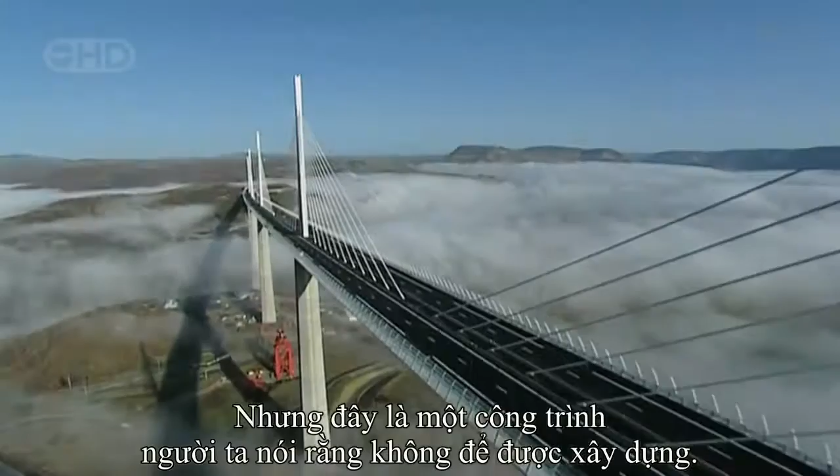But this is a megastructure they said couldn't be built. When I first showed the drawing of this bridge, they really thought I was crazy.

The team attempting to build this amazing freeway in the sky had to survive landslides, fight winds gusting at 130 kilometers an hour, and weather massive storms as the bridge simply hung in the balance. It's a bridge that pushes the boundaries of engineering to the limits, and then beyond.

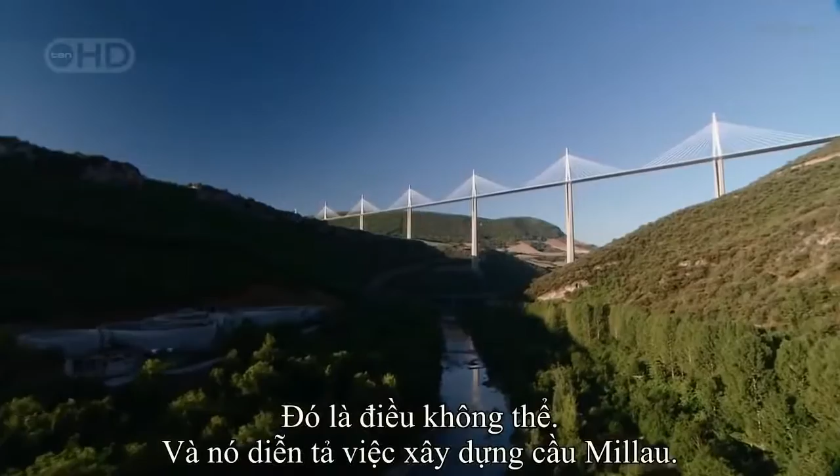Imagine building a series of Eiffel Towers, then slinging a 4-lane highway between them, all the way across one of the deepest valleys in France. Impossible though it sounds, that pretty much describes the building of the Millau Viaduct.

From the start, the construction team faced 3 daunting challenges. One, build the tallest bridge piers in the world. Two, put a 36,000-ton freeway on top of them. And three, erect 7 steel pylons, each weighing 700 tons.

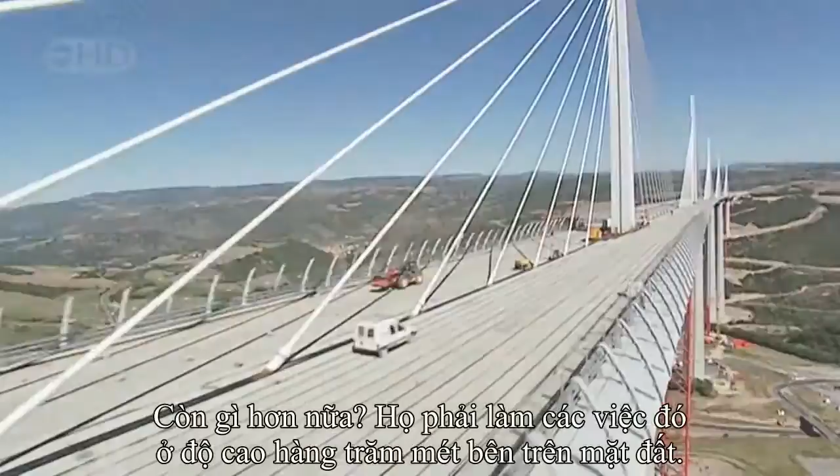And what's more, they had to do this hundreds of meters above solid ground. So high that if you were on top of the Eiffel Tower, you'd still be looking up at this awesome bridge.

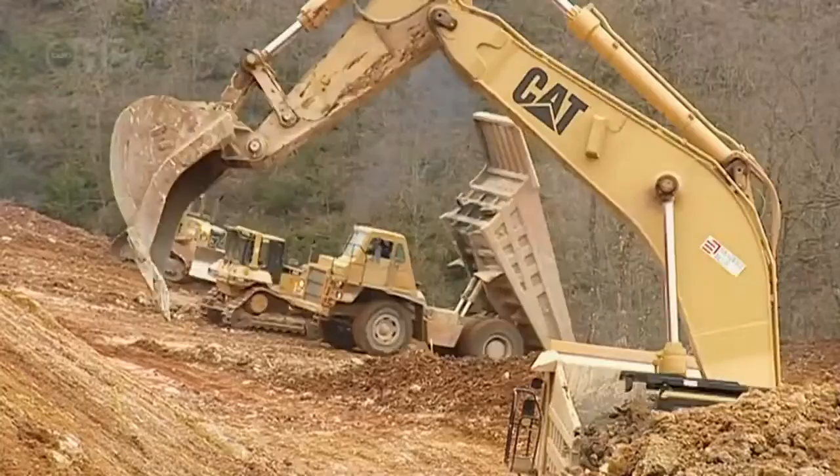October 2001, the team break ground. They're required to build a bridge that'll last for 120 years. And to win the contract, the teams promised to build it in record time, less than 4 years. By comparison, the world's longest suspension bridge, the Akashi Kaikyo in Japan, took a full 10 years to build.

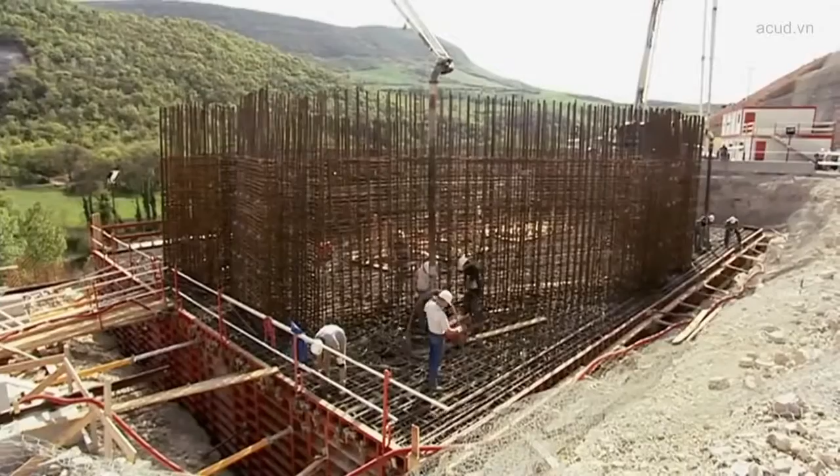To up the ante, any delay will cost them $30,000 a day in penalties.

There are 7 piers, numbered from the northern end of the valley. Number 1 will pose problems because of the steep slope. Number 2 will be the biggest challenge since it's the tallest. Crossing the river, number 3 is not much shorter. Then 4, 5, 6, and 7 climb the gentler slope to the south.

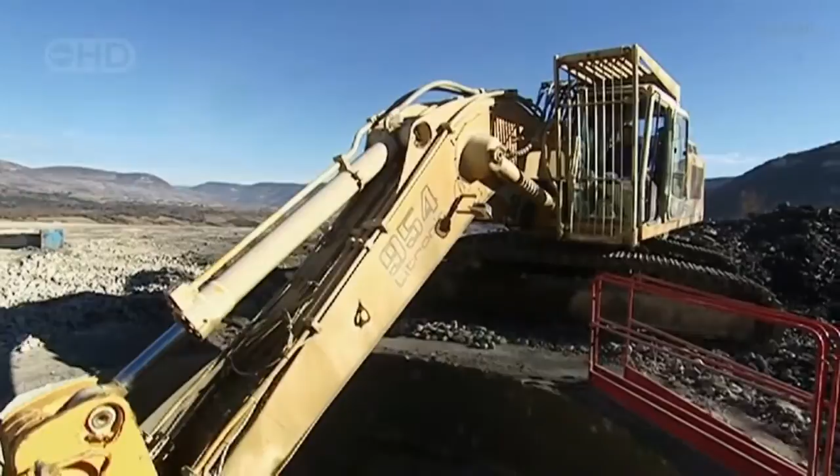To begin, the team had to bury the foundations deep in the bedrock in order to support the enormous weight the bridge will place on them. But the forces of nature were stacked against them.

Geologists have warned of the risks posed by the region's fractured limestone. The rock is full of cavities that are essential to the local cheese economy. These cave systems close to Millau are home to a unique bacteria responsible for the blue mold in the world-famous Roquefort cheese. But what's perfect for cheese could be disastrous for a megastructure.

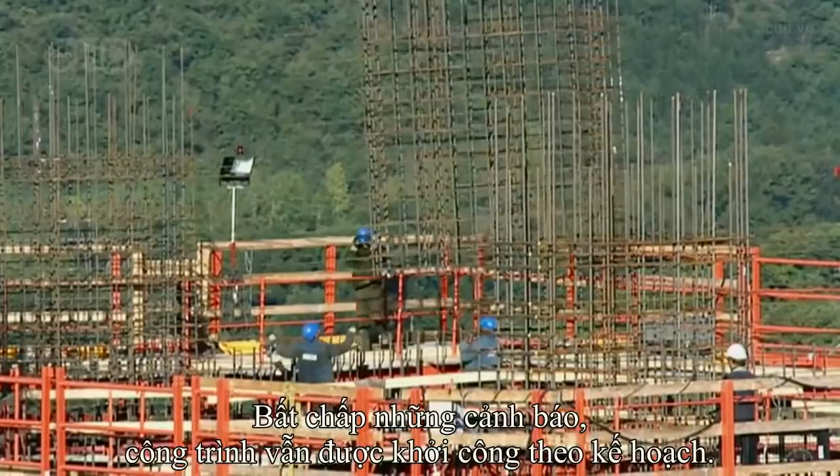The geologist's diagnosis spelt one thing: landslides. This kind of catastrophe could jeopardize the entire project. Despite the warnings, building went ahead as planned.

Then, well into construction, as predicted, a dramatic storm causes a landslide. 4,000 cubic meters of rock collapse around Pier 1. Fortunately, the fallen rock doesn't damage the pier, but the warning is clear. They're forced to divert precious manpower and equipment to stabilize the slope and prevent a repeat collapse.

So if the area is prone to landslides, why did they build the world's tallest bridge here in the first place? The answer is simple.

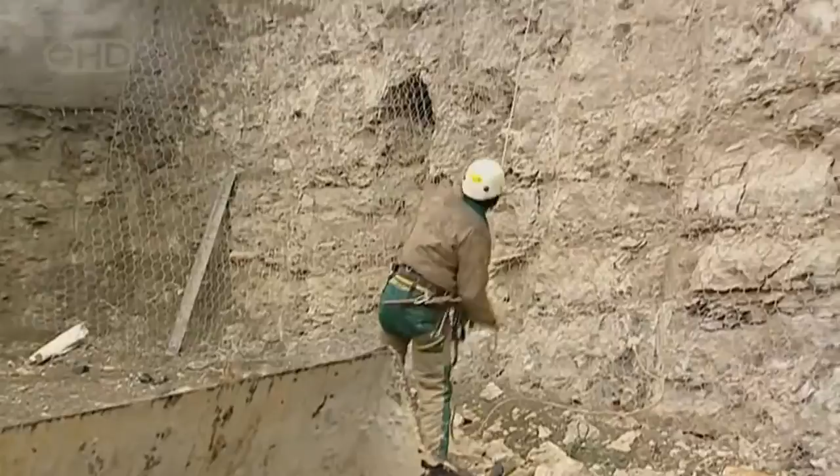In the 1980s, France built a freeway linking Paris directly with Spain. This major artery headed south across the French countryside, while from the Mediterranean, the freeway headed north, until they both hit one of the deepest valleys in France and stopped dead.

Welcome to Millau, France's least favorite bottleneck. The town of Millau is in the mountainous region of the Massif Central, one of the most tranquil parts of France. But in summer, this poor medieval town suffered traffic hell.

The locals couldn't take it anymore. Neither could their mayor. It was terrible for our reputation. When you hear every day on the television and radio, avoid Millau, there's a traffic backup, a 5-hour wait in Millau.

And it's not just the people of Millau. Two drivers, Jamila and Jemima, crossing the 30-odd kilometers between the freeway on either side of Millau, reveal exactly why this bridge is needed. Jamila, in car 33, will cross the new bridge, while in car 22, Jemima will take the old road across the valley floor.

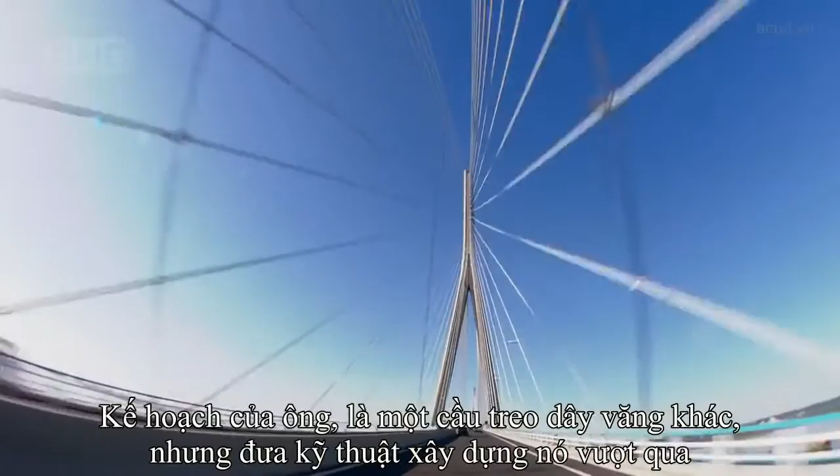With this record-breaking structure completed, Virlogeux was on to his next project, Millau. His plan: another cable-stay bridge, but pushing the technology beyond anything previously attempted, with piers 4 times higher than the Normandy Bridge.

The Millau Bridge would not only be the world's tallest, it would be unlike any bridge ever constructed. When I first showed the drawing of this bridge to the relevant authorities, they really thought I was crazy.

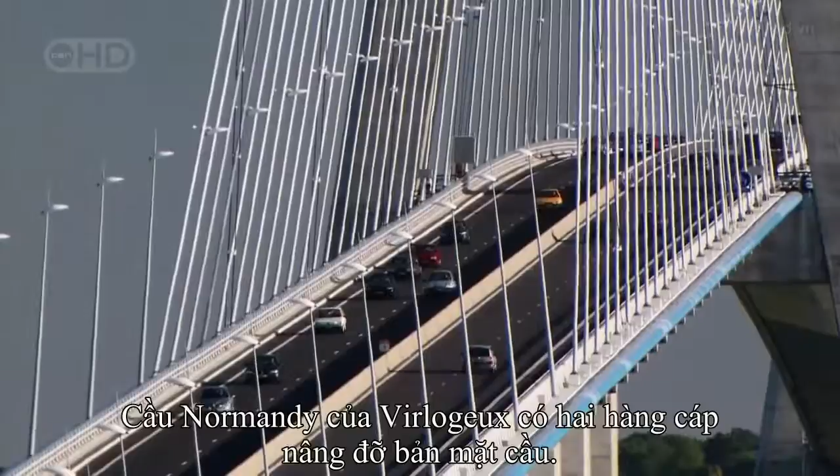Virlogeux's Normandy Bridge has 2 sets of cables supporting the deck. But he wanted to up the stakes for Millau by losing 1 row of cables, so the remaining line would be forced to do twice the work. More dramatically, the 2.5-kilometer Millau Bridge, instead of having a single main span, needed a whole series of piers to support it across the valley.

No bridge builders had ever attempted a multiple-span, single-line cable-stay bridge on this scale before. The French authorities had a problem. Nervous about Virlogeux's groundbreaking scheme, they held a competition inviting other engineers and architects to compete with different designs.

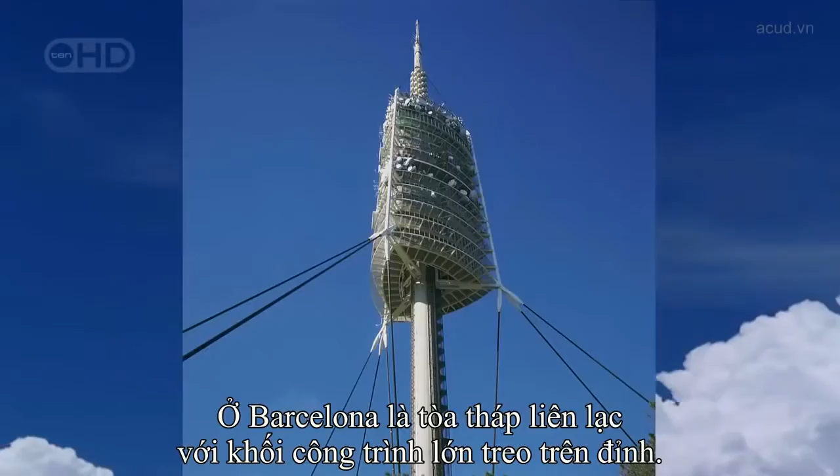The winner, Lord Norman Foster, is one of the world's superstar architects. In Hong Kong, he built the world's largest airport terminal. In Barcelona, offices literally hang from a mast on his communications tower. This is a man who regularly contemplates the impossible and delivers.

You know, it's the challenges, one challenge on top of another, on top of another. And with Millau, one of the biggest challenges was making it fit into the landscape, given it's just down the road from the famous Gorges du Tarn, France's equivalent of the Grand Canyon. How do you make something which has to be so immensely strong against the forces of nature look very gentle, very delicate? How do you weave something on that scale into the most unbelievable landscape?

Ironically, Foster's answer was to take Virlogeux's pioneering scheme, then push it one stage further. He turned an elegant piece of engineering into a delicate work of art by boldly cutting out 2 of the 9 original piers and seriously slimming down the remaining piers and road deck. Foster wanted the bridge to appear as delicate as a butterfly, but this butterfly has to support the weight of 5 Eiffel Towers in gale-force winds hundreds of meters above the River Tarn. Getting the design wrong would be a disaster.

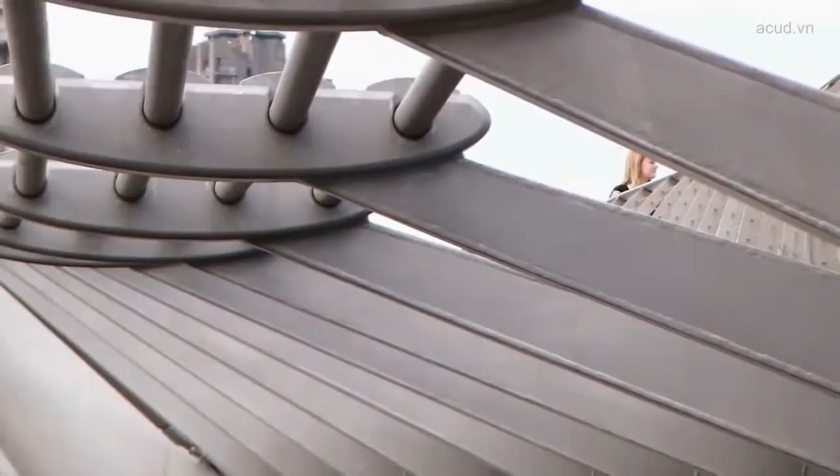Then, with Millau still on the drawing board, Foster's record as a bridge builder suffered a major setback. His Millennium Bridge in London is actually another record-breaking structure, the lowest profile suspension bridge in the world. But when this footbridge opened to the public in June 2000, it was a public relations disaster.

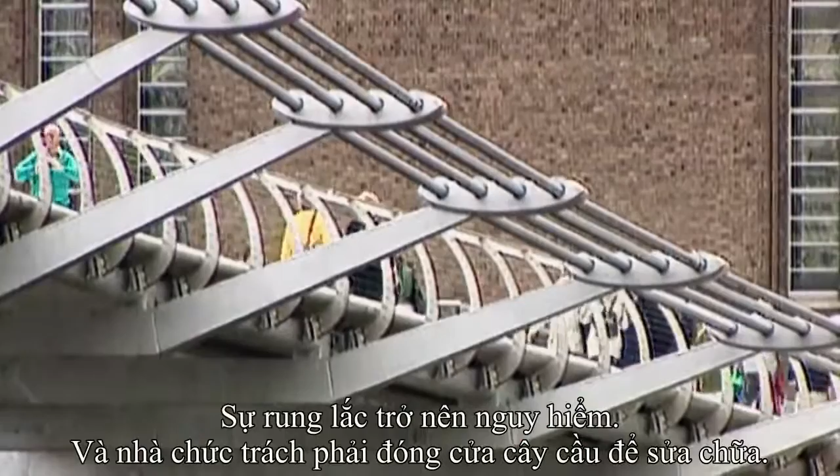Crowds walking over it set up a resonant frequency, and the bridge began to sway. As people adjusted their step to the small initial wobble, the effect was magnified. Though it didn't threaten the structure, the swinging motion became so dramatic, the authorities closed the bridge for a refit that took 1.5 years and ended up costing over $8 million.

It was a bad omen for the Millau Bridge, where construction was soon to begin. And at 15 times the height, a design flaw would be a catastrophe.

December 2001. France's Millau Viaduct, the tallest bridge in the world, is under construction. Everything about this project is supersized. It'll need 200,000 tons of concrete, so much that the team have to build a concrete factory on site.

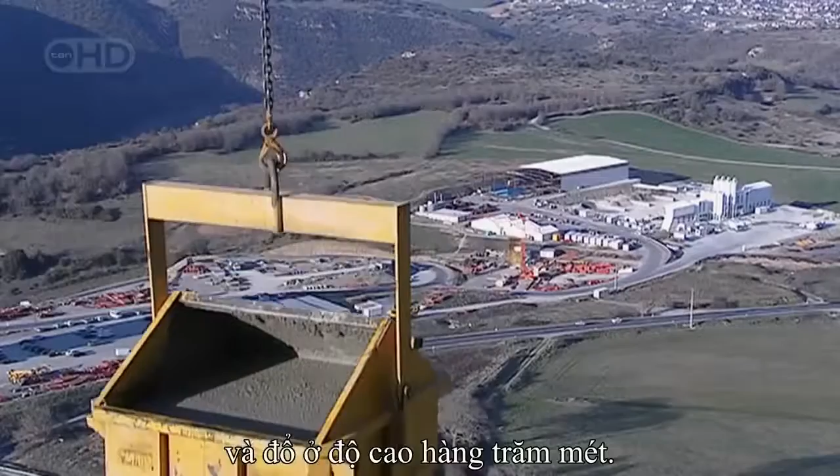But there's nothing straightforward about this concrete. The formula must be just right. It needs structural strength to support the massive loads it'll have to bear. But it can't set too quickly, as it has to be hoisted into position and poured hundreds of meters in the air. And it needs to be just the right color to suit Norman Foster's vision.

In fact, the architect's vision has created a headache for the construction team. He's designed each pier as a complicated geometric shape, tapering the entire way up with vertical grooves set into them to create shadows. But what's just a line on paper for the architect was a major challenge to build.

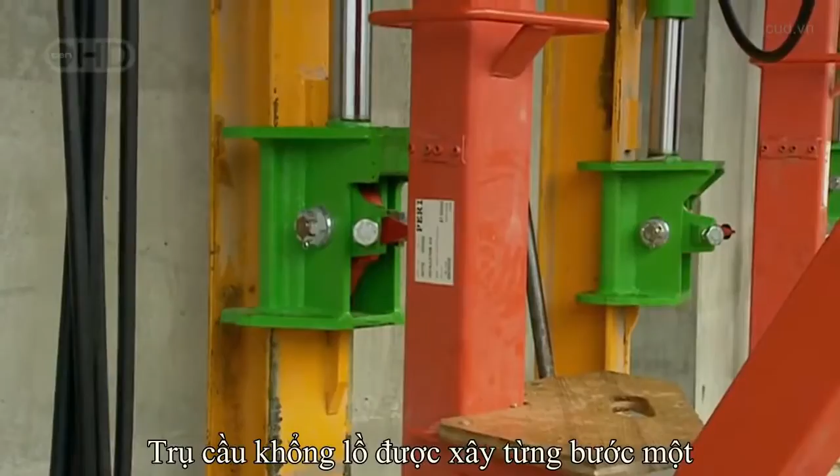The enormous piers are built step by step by pouring concrete into a temporary mold. To give the required strength, the molds are filled with a frame of steel reinforcing bars. In total, 16,000 tons of these steel bars are hoisted into place and secured. Laid end to end, they'd stretch the 4,000 kilometers from Millau all the way to Central Africa.

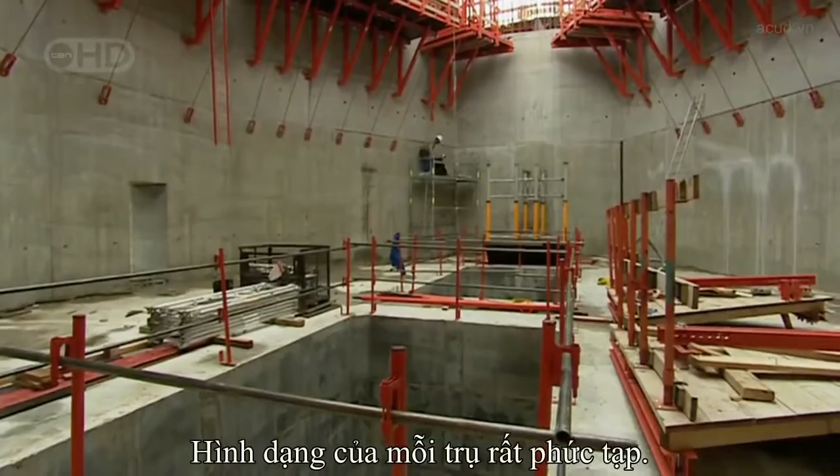The shape of each pier is seriously complicated. As a result, each time they remove the sections of red steel shuttering, they have to change the shape of the mold to fit the profile of the next 4-meter section. Manhandling these steel panels, weighing up to 15 tons apiece, is no picnic. And with the combined height of the 7 piers totaling well over 1 kilometer, they have to change the shape of the mold over 250 times.

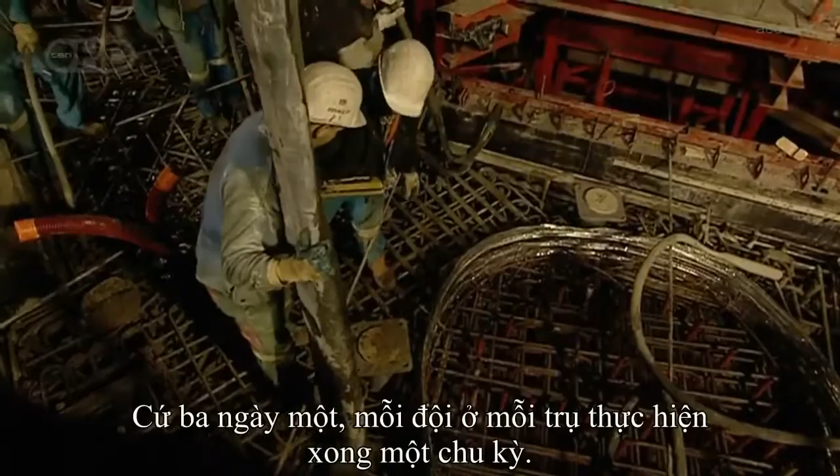Every 3 days, each team on each pier went through this whole cycle, then repeated the process. But it was a race against time, with a permanent threat of delay. Keeping the entire build on time and to budget was the daunting responsibility of one man, Jean-Pierre Martin. If instead of 3 days we took 4, imagine that multiplied by the number of castings. We'd end up with a 3 to 6 month delay.

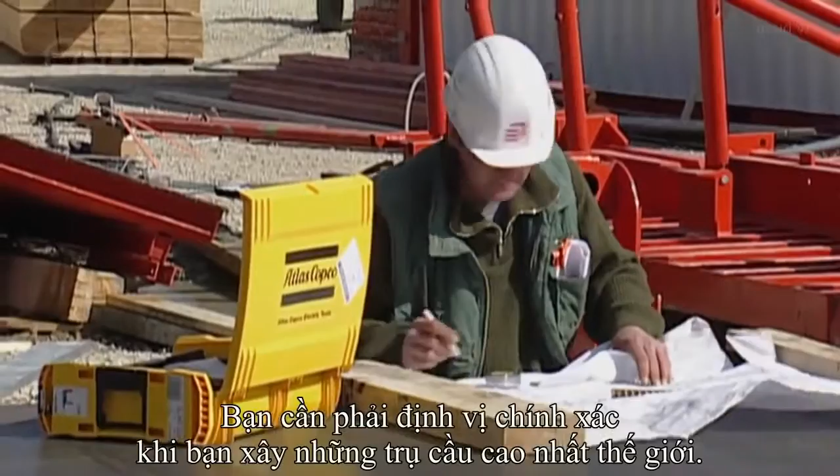With a penalty of nearly $1 million a month, this isn't something Martin wanted to contemplate. And this schedule wasn't his only headache. You have to be pinpoint accurate when you're building the tallest bridge piers in the world. Get it wrong, and the bridge simply won't fit together. Just 10 centimeters out, about a hand's width on each 4-meter section, and the tallest pier could be 6 meters off at the top, the width of a jumbo jet fuselage.

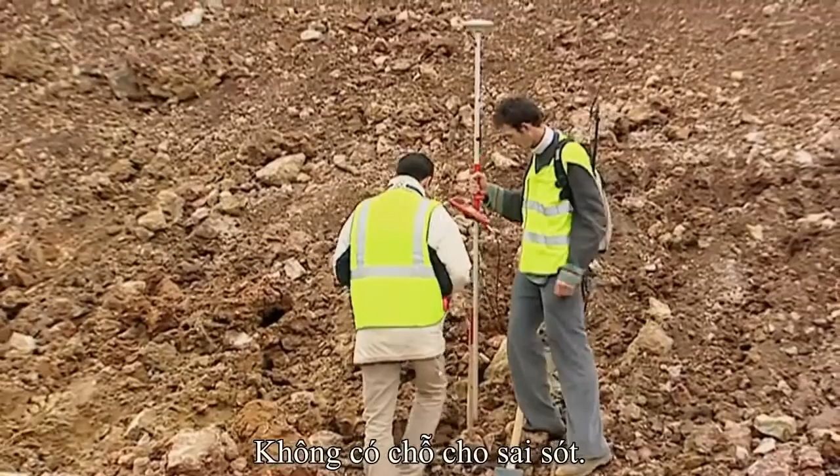Each team was aiming for a specific point in the sky. For Pier 2, this was exactly 245 meters above the ground, 546 meters from the north side, and 1,914 meters from the southern end. There was no room for error. The only chance they had to get it right was with GPS, accurate to within 4 millimeters. Using signals from multiple satellites, the team could pinpoint their position and make sure they're on target for that critical point in the sky they needed to hit.

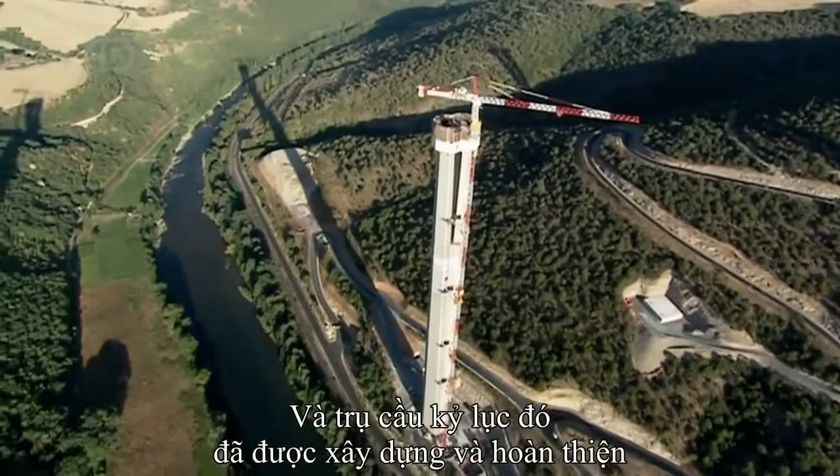Month after month, the piers climbed higher. Finally, by November 2003, they reached their full height. At 245 meters, Pier 2 becomes the highest bridge pier in the world. But is this record-breaking pillar where it's supposed to be? Amazingly, it's dead on target, to within 2 centimeters.

Champagne corks pop. It's time for a major celebration. Against all the odds, they were 1 month ahead of schedule, but the team couldn't afford to relax. The next stage of the project would be the most difficult part of the build.

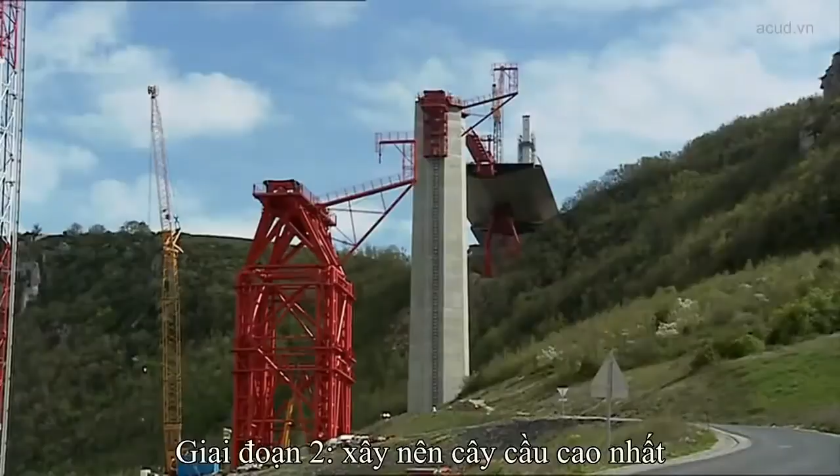Phase 2 of building the world's tallest bridge involved putting a 2.5-kilometer roadway weighing 36,000 tons on top of the piers, a full 270 meters above the River Tarn. Bridge builders know danger comes with the territory, but working at these heights can be lethal.

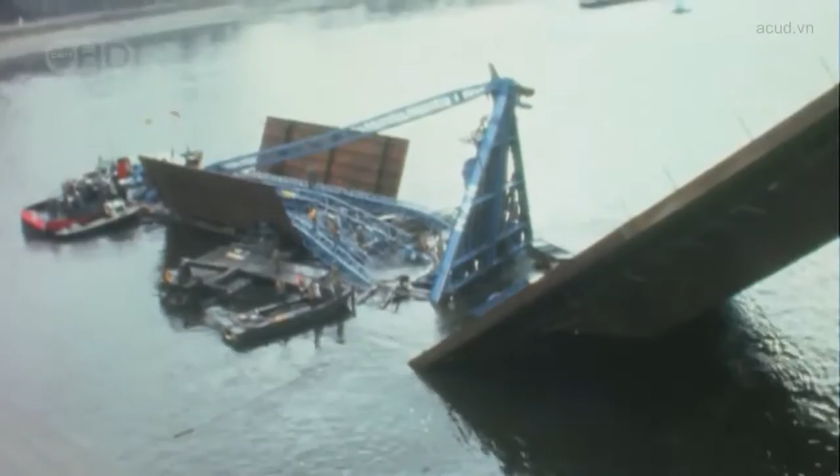With these fatalities in mind, the team decided to fabricate the entire road deck on the safety of solid ground. This meant building it in steel, which in theory would be much safer than lifting vast concrete sections hundreds of meters into position. There's only one problem with this plan: no one had ever put a road deck on piers anything like this height before, let alone over a 2.5-kilometer span.

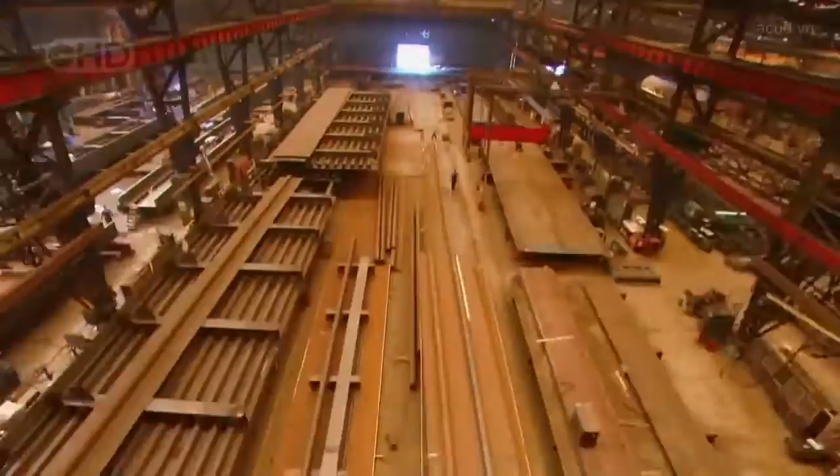In the end, only one steel manufacturer had the courage to take on this colossal challenge: Eiffel, the steel firm set up by the great French engineer. Eiffel built what was once the tallest bridge in the world, the Garabit Viaduct in southern France, before getting round to the framing for New York's Statue of Liberty and, of course, his signature tower in Paris.

But despite the company's experience, Eiffel's director, Marc Buonomo, knew he was taking a serious risk. It was a gamble for the company, because if there had been a mistake, if it hadn't worked, it would have been the whole company.

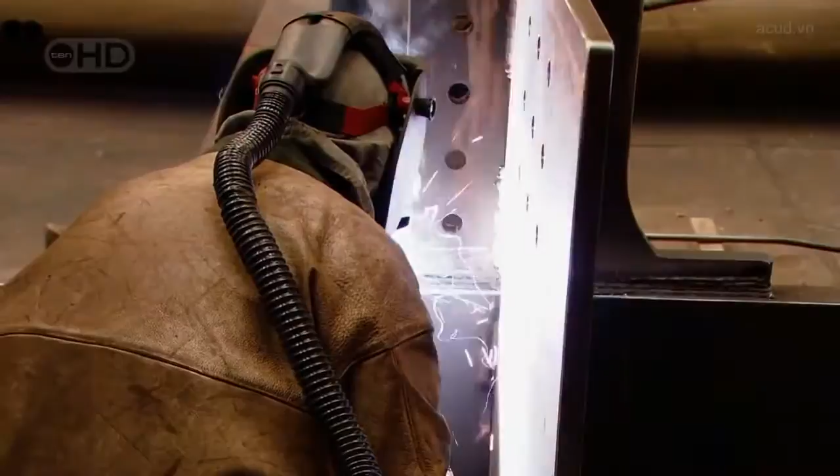They fabricated the massive sections that would make up the road deck in the company's steel factories. This immense jigsaw puzzle involved manufacturing 2,200 separate sections, weighing up to 90 tons and some of them 22 meters long.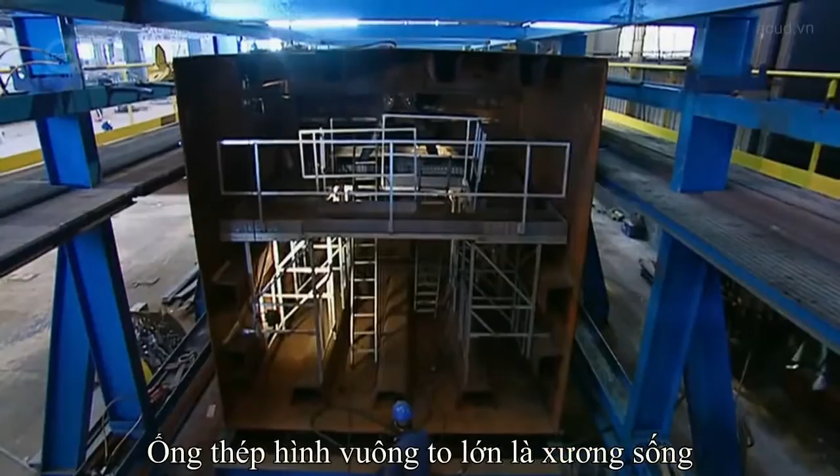Their accuracy is measured with a laser to within a fraction of a millimeter. The huge square tubes are the central spine that should make the deck rigid. The triangular side panels will be welded on either side to create the width for a 4-lane highway. To meet the punishing schedule, Buonomo automated the manufacturing with a 2-headed welding robot and a plasma cutting machine.

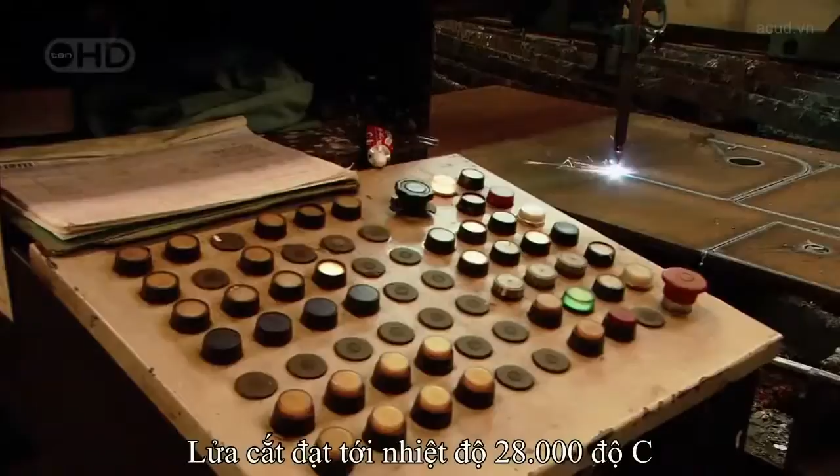Each cutting pattern or template is programmed into the computer. Then the machine automatically blazes its way through the steel. The torch reaches a scorching 28,000 degrees centigrade. That's 5 times the temperature of the Earth's inner core.

But cutting and welding was the easy part. The hard part was getting these monster sections the hundreds of kilometers from the factories to Millau. The routes had to be planned with precision to avoid major damage. The police coordinated safety and clearances. Even with that level of preparation, some obstacles felt as if they're cutting it just too close for comfort.

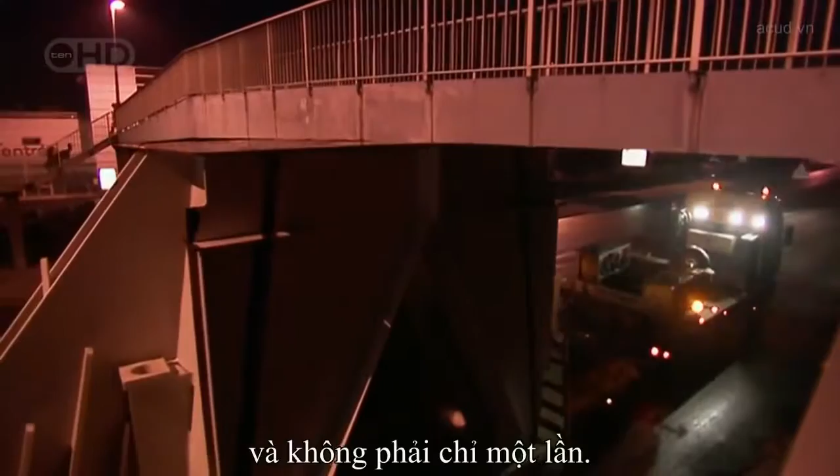And this was no one-off event. To build the viaduct took over 2,000 of these extraordinary road convoys.

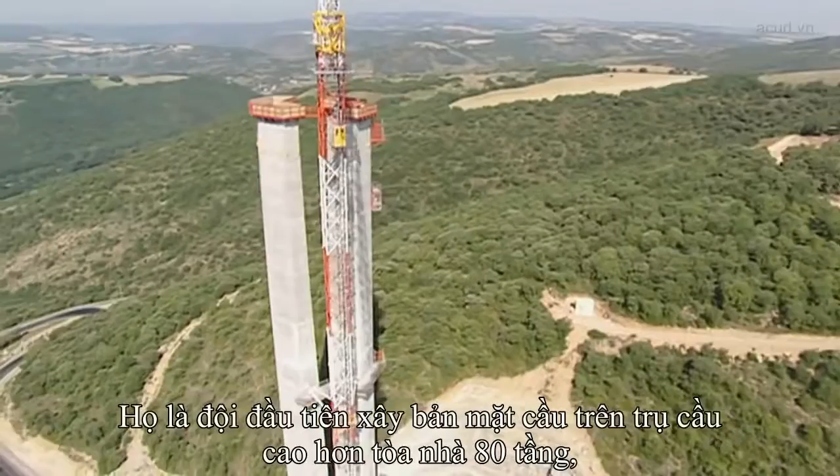The components arrived at assembly plants set up on either side of the valley. Here, the pieces of the massive jigsaw puzzle were welded together to form the two halves of the deck. But getting these two halves to span the valley on top of the world's tallest bridge piers would be a major challenge. They'd be the first team to put a road deck on a pier taller than an 80-story skyscraper.

Pushing bridge building beyond anything attempted before, they planned to slide the entire 2.5-kilometer road deck over in two colossal pieces. The bridge's chief engineer, Jean-Marie Cremer, was one of the few people who believed it could be done. All the engineers who know this method didn't believe it was possible. If the team had got their calculations wrong, the entire structure could collapse into the valley.

We found a solution for the construction, which was to launch the bridge from the two sides: one part on the Larzac Plateau, one on the Rouge Plateau, and to push them from the two sides and make them come and meet here above the River Tarn.

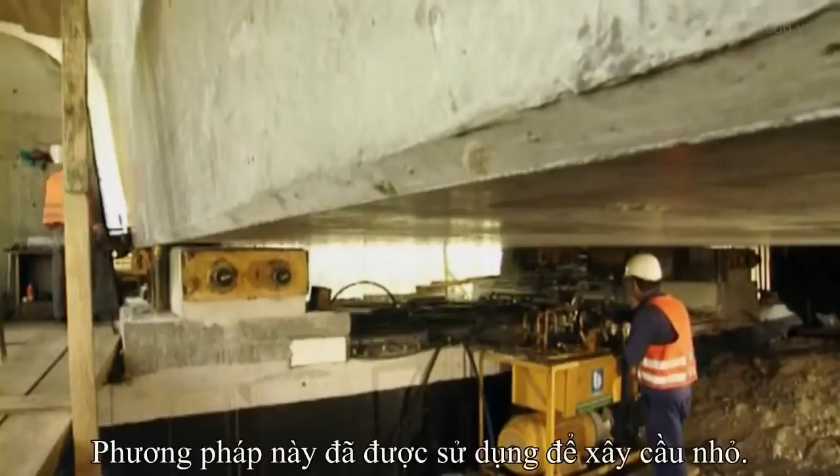Smaller bridges use a similar technique. A powerful set of hydraulic rams literally pumps the deck from one side to the other. But Millau would be the longest launch ever attempted over the highest piers in the world, and the results could spell disaster.

The deck is so slender it would bend and collapse if it were pushed out over the 342-meter spans between each pier. The furthest anyone's previously managed is less than half that distance.

The first part of the solution was simple: fit a pylon so its cables support the front of the deck as it goes out over the valley. Then construct temporary steel support towers that halve the spans to a more manageable 171 meters.

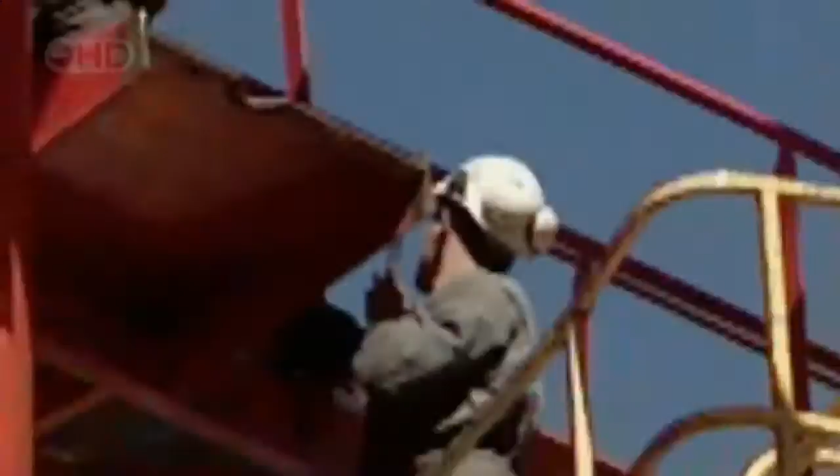These steel towers were a construction feat in themselves. The largest, over 170 meters high, is the tallest ever built, and they needed to carry a massive load.

7,000 tons as the leading edge of the deck, together with the first 90-meter pylon, slide over. Simply pushing this enormous weight over the top of the vulnerable piers would bring them crashing to the ground. This was the nightmare scenario.

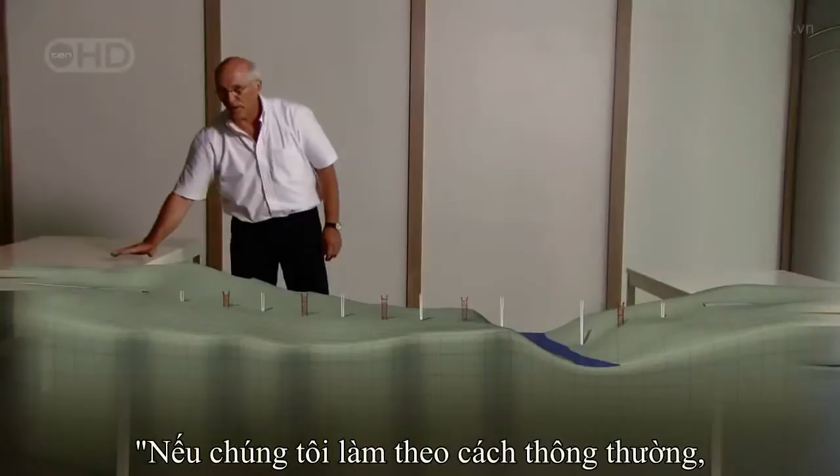If we'd done a conventional launch, we would have knocked the piers over like the pins in a bowling alley.

Someone needed to reinvent the way this type of bridge is built. It's Marc Buonomo with Jean-Marie Cremer who came up with the breakthrough. The basic principle can be demonstrated with a heavy box and a wobbly table.

With a normal launch, you knock over the piers. I want to advance the deck over the pier, but if I push the deck from here, I'd knock over the piers, because they're so tall.

The idea is to install a launching system on top of the pier, and that way, if I push the deck, it has no effect on the stability of the piers, and the piers won't fall over.

The trick is to use a series of these launching systems to jack up the deck and inch it forward. Each system uses two wedge-shaped blocks under each side of the deck. The upper wedge is pulled forward by a hydraulic ram, sliding up the slope of the lower wedge while lifting the deck from its supports and advancing it 600 millimeters. The lower wedge then retracts, dropping the deck onto its supports. The upper wedge returns to its original position, and the whole cycle begins again.

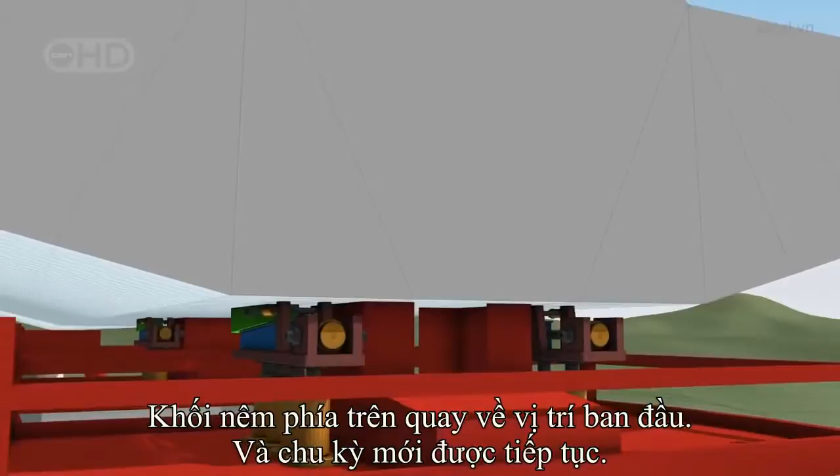Four of these clever devices are placed on each pier, all programmed to work at exactly the same time. The result is that together, they pick up the entire roadway and shunt it forward. But if one fails or gets out of step, it could spell disaster—the force could push the bridge piers apart till they collapse.

When you're up there and you see Millau 300 meters below you, you ask yourself, was this a good idea? The future of the entire project was now hanging on a prototype, and it had never been tested.

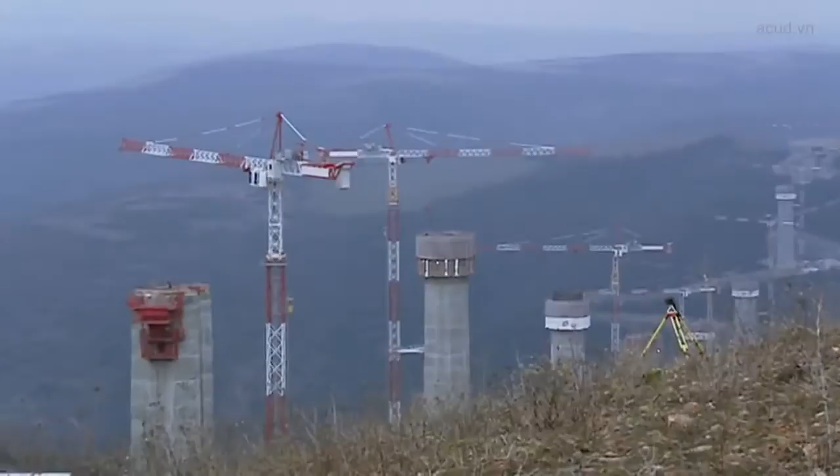It's the morning of February 26, 2003. Do or die day for the world's tallest bridge. Everything is about to be put to the test: the flexibility of the deck, the strength of the temporary piers, and critically, the pioneering hydraulic ram system.

Even Buonomo, the man in charge of the launch, had his doubts. As it had never been done before, I have to tell you, I had fears that it wouldn't work.

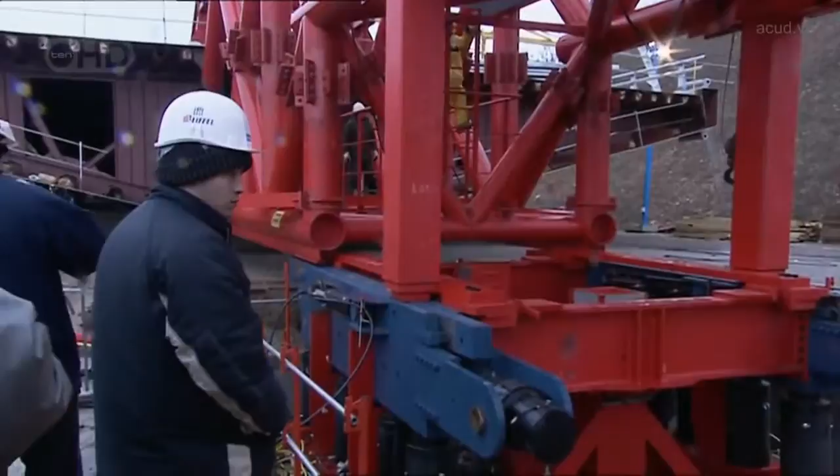The pumps kick in, the pistons start to push, and the deck begins its huge journey across the valley. The moment I heard the motors start, I put my finger on the deck, and I could feel my finger move.

Every 4 minutes, the deck advanced 600 millimeters across the valley. Surveyors tracked its progress, but it was still a nail-biting time as they watched the unsupported deck crossing the void.

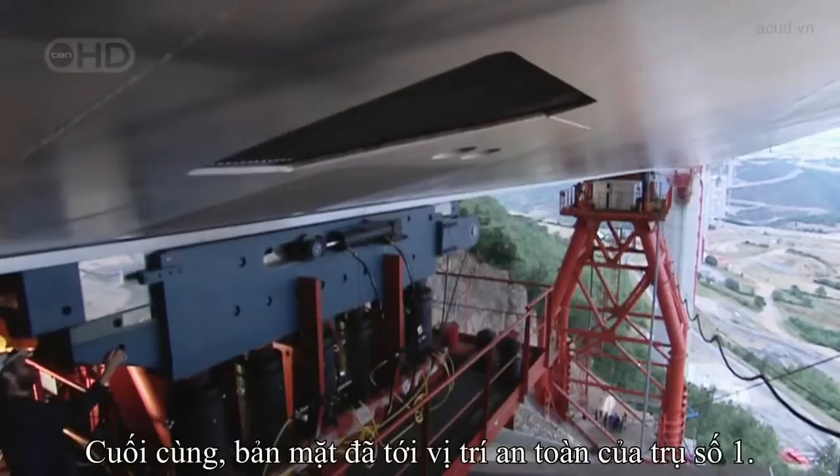Eventually, the deck reached the safety of the first pier. 204 meters down, only 2,256 to go. The launching system seemed to be working as planned.

The engineers were feeling optimistic. But as the deck advances into space, it'll become more vulnerable to the wind, which can reach 130 kilometers an hour. Unfortunately, the road deck has the shape of an upside-down airplane wing, and the team's greatest fear is that this wing could simply take off.

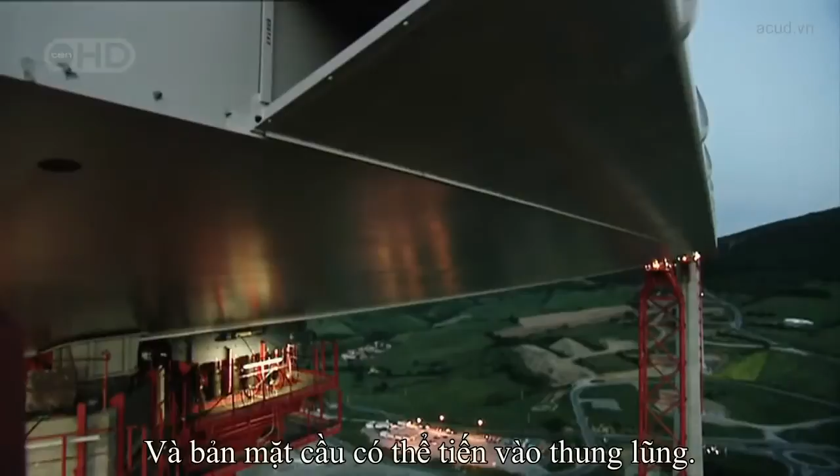The engineers kept a close eye on the wind and weather conditions. When they were satisfied there was a 3-day weather window and the wind wouldn't exceed 85 kilometers an hour, they'd give the construction team the go-ahead, and the deck launch could continue. The reason for this precaution is simple: strong winds can literally tear a bridge apart.

In 1940, Washington State built a suspension bridge across the Tacoma Narrows in the US Northwest. It opened with a grand ceremony on July the 1st. But the celebrations were short-lived. The bridge had a major problem: the wind.

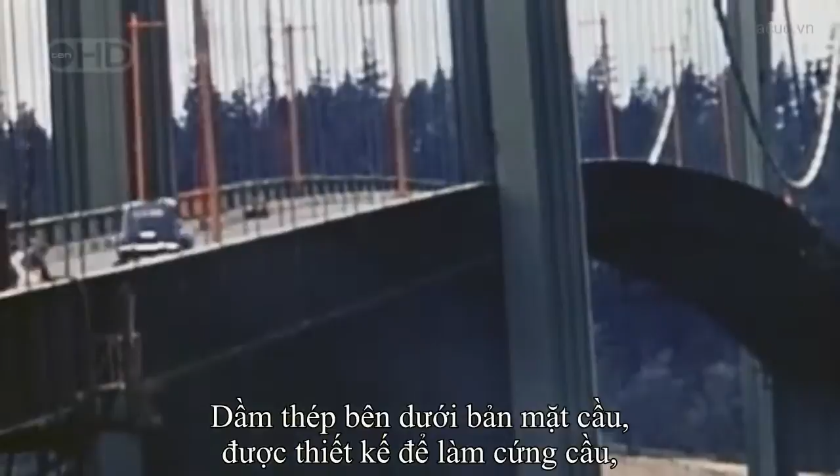Girders beneath the deck, designed to make the bridge rigid, actually blocked the wind, causing the roadway to ripple alarmingly. Locals soon dubbed it Galloping Gertie.

On the 7th of November, with the wind less than 70 kilometers an hour, the bridge begins to twist violently. At 11 a.m., time runs out for Galloping Gertie. The wind sends the bridge crashing into the river.

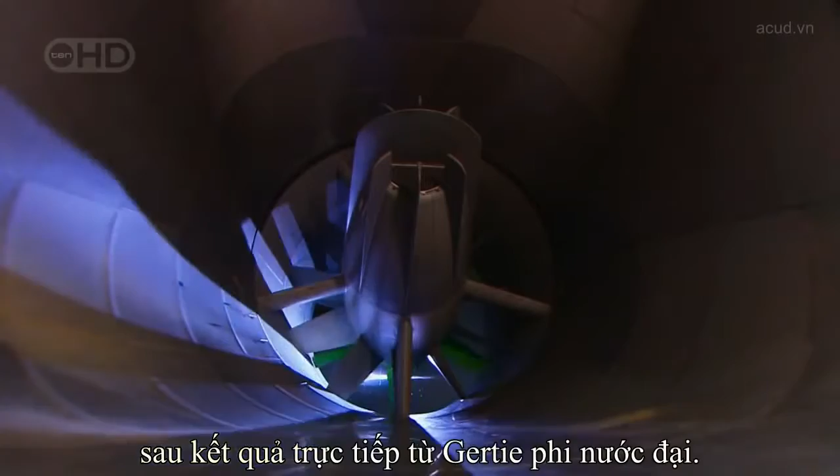Wind tunnel testing is now standard procedure as a direct result of Galloping Gertie. For the Millau Bridge, they analysed the wind in the Tarn Valley over 18 months, then recreated those conditions in the wind tunnel. Wind engineer Olivier Flamand was shocked by the results: the average wind speed was relatively low, but because there's such strong turbulence, it created very fast peak winds.

The rugged terrain creates serious turbulence at the height of the road deck. Winds peak at 130 kilometers per hour. That's hurricane force.

They tested every aspect of the bridge to analyze the risks: piers, pylons, and critically the deck. But it's not just the aerodynamics of the finished bridge. They needed to find out how it would behave when it was most at risk, during the launching of the deck.

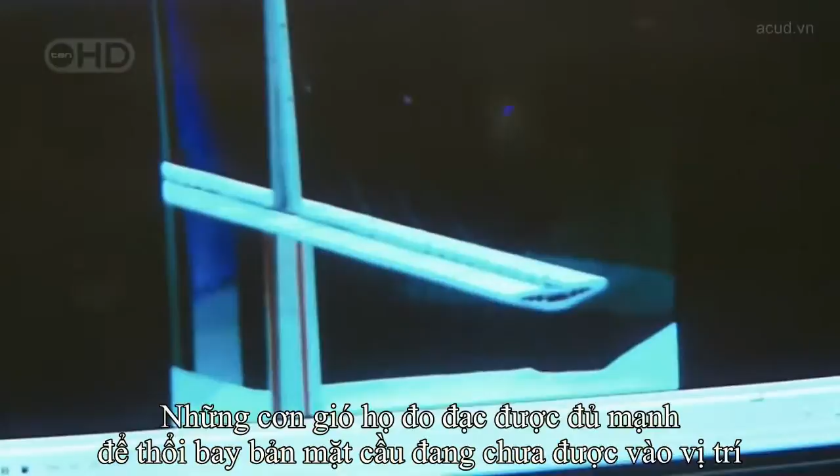Olivier and his team reached a chilling conclusion. The winds they've measured are strong enough to blow the unsecured deck off its supports and send it crashing hundreds of feet to the valley floor.

And then the nightmare began. On the 22nd of August 2003, 6 months into the deck launch, one of the launch systems failed, leaving the deck hanging in the wind. To make matters worse, the weathermen were predicting storms.

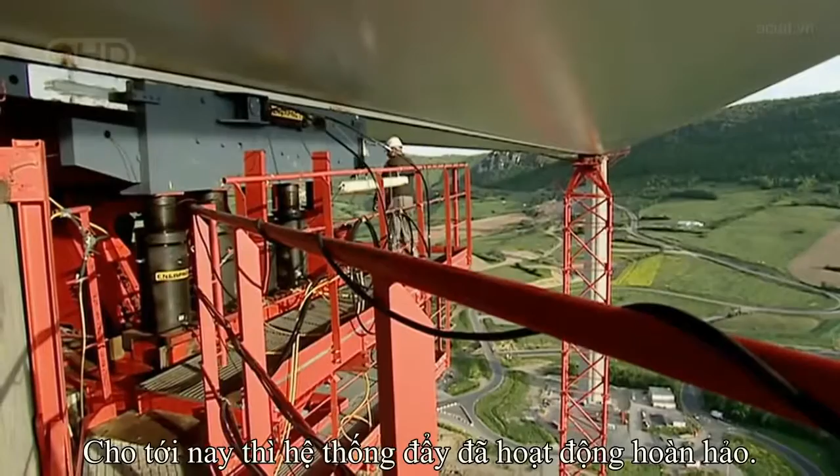So far, these massive pumping machines had worked perfectly. But the fact is they were prototypes, and due to the frantic schedule, they'd never been tested. The problem was that the non-stick Teflon between the sliding surfaces had ripped, and the friction generated was too much for the hydraulic rams to push against.

Unfortunately, no one had planned on replacing parts of this monster machine mid-launch on the top of a massive concrete pillar. This was very bad news for the man who staked his reputation on this system.

It was maximum stress, like poison in your mouth. You don't forget that.

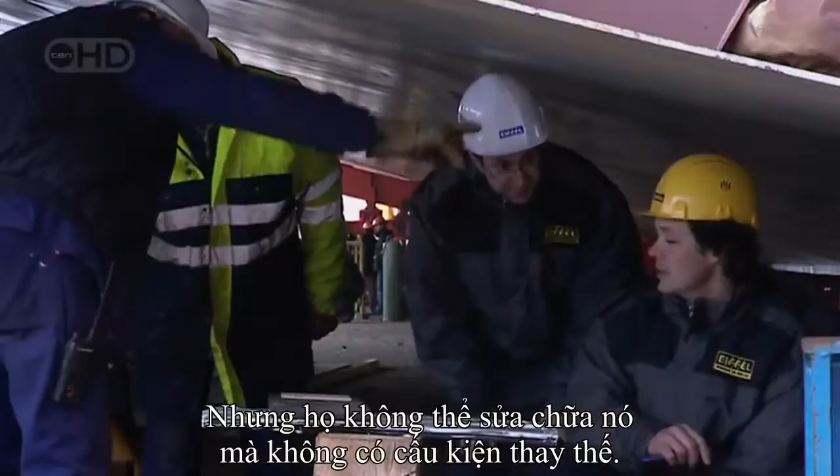Re-examining their calculations, they realized the cause of the problem. They'd underestimated the forces between sliding surfaces, but they wouldn't be able to repair it without the necessary spare parts. The clock was ticking, and Marc Buonomo needed a solution fast.

When Apollo 13 came back with that incident, the NASA engineers requested they did the inventory of everything there was on board to know how to fix it.

The Millau team did an inventory. They realized that the other launching machines, not yet being used, could be stripped to provide the new Teflon surfaces they needed. Working all through the night, the team extended the access platform. This allowed them to take out the 5-meter-long, 2-ton steel wedges, replace the Teflon, and reassemble the launching machine.

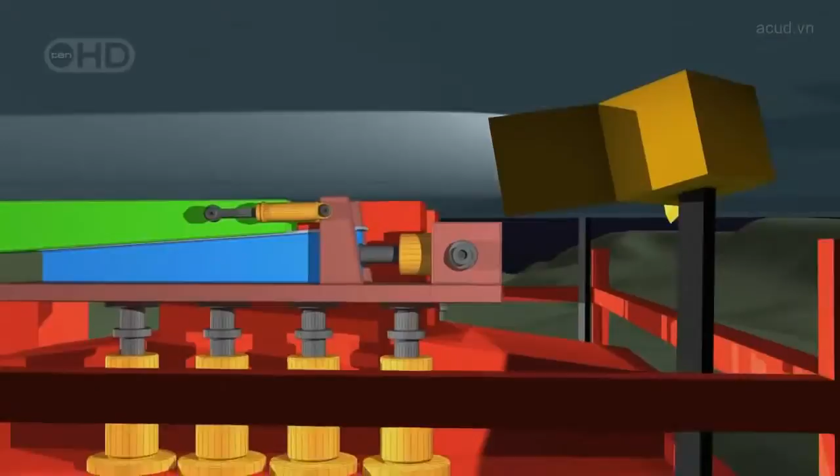By 8 a.m. the next morning, it was ready to resume the launch.

The rest of the week, the predicted storms arrived, and another set of launching machines wore out. So when the deck finally made it to the safety of the next pier, the team breathed a major sigh of relief.

You don't forget that. I won't forget that for 4 hours, I was really scared.

The two decks continued their journey across the valley. Day after day, week after week for a full 14 months, they approached each other, millimeter by millimeter.

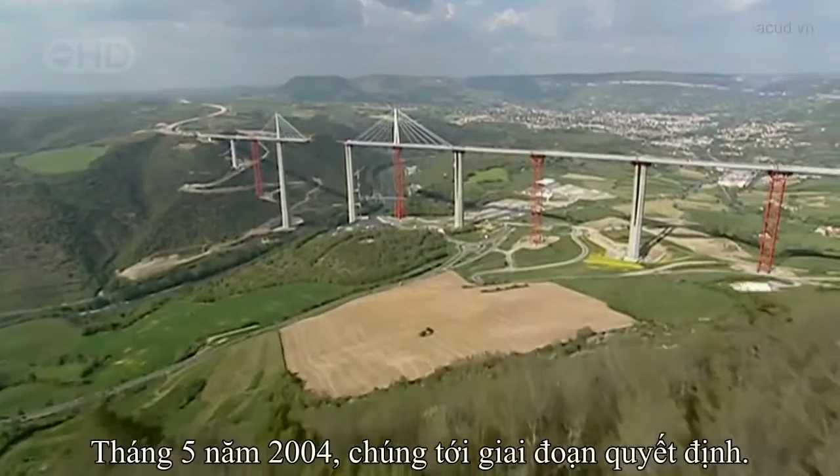By May 2004, they'd reached a critical phase. From the northern end, the shorter deck had traveled 717 meters into space to reach its final resting place. From the south, the longer deck extended over 1.5 kilometers. Only the section over the river, the one point where it was impossible to erect a temporary pier, divided them.

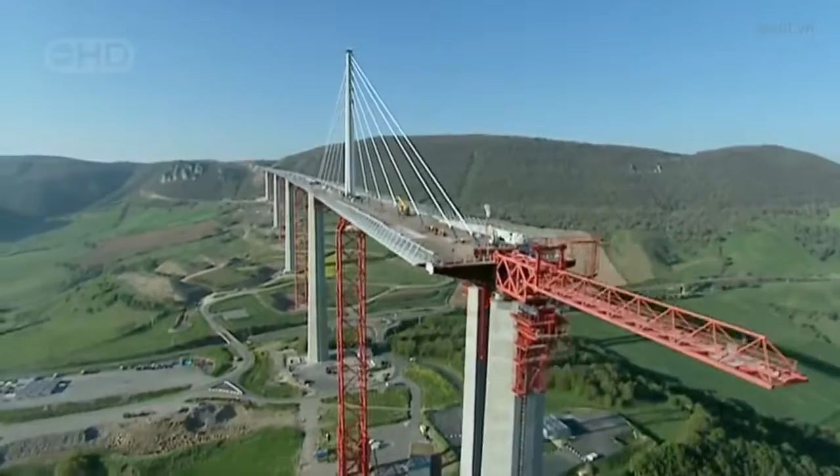But would they meet as planned? If they've got their calculations wrong, they'll have built the biggest white elephant in Europe. Even the man behind the whole project had his doubts.

I was not convinced at all that the two parts of the deck could meet exactly with a perfect geometry.

The odds were against them. Calculating such a feat so precisely is a Herculean task. Firstly, the two starting points on the northern and southern slopes of the valley are at different heights. Secondly, the bridge has a subtle curve to it. As a result, each steel panel which makes up the road deck had to be cut and welded with extreme precision. It would be an engineering triumph if they got these two sloping curved decks to meet as required.

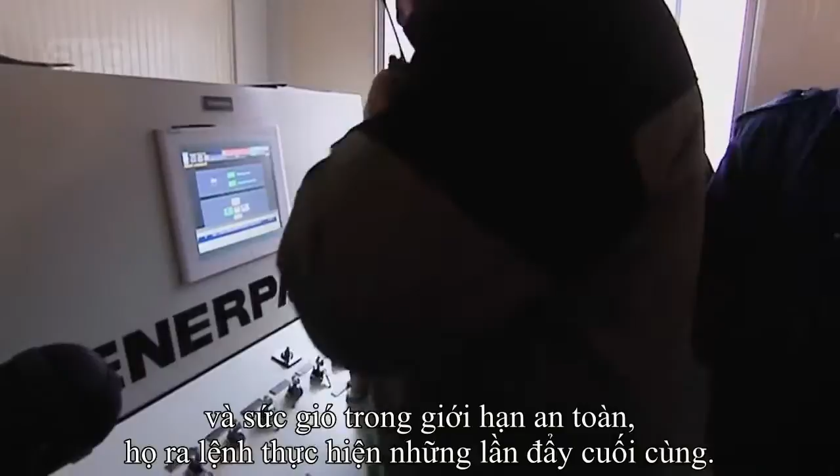The team checked the weather reports. With the wind inside safety limits, they gave the go-ahead for the final push. The rams began to drive the deck's leading edge off the safety of Pier 3 towards its destination. At this point, a total of 21 launching systems needed to move at exactly the same moment to avoid disaster. If anything were to go wrong now, the man responsible would be Marc Buonomo.

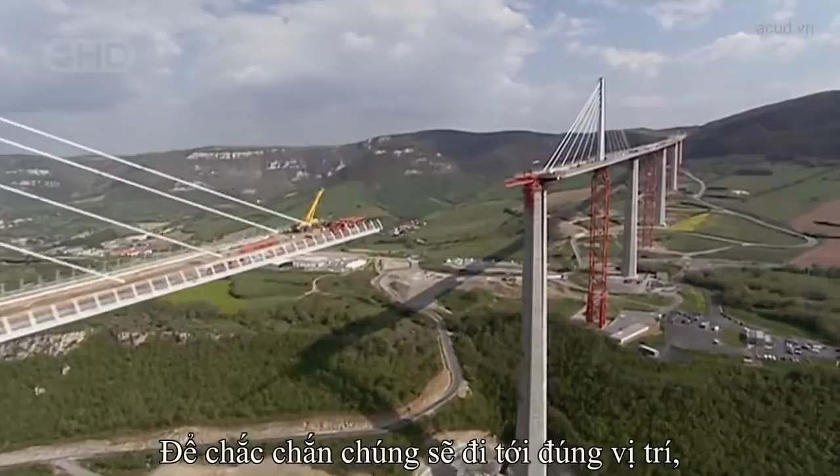Everyone asked me, how can you be sure that it will go straight? So to be sure that they were going to the right place, I had a GPS put on the front, so I could see the gap between the theoretical and the real position.

Over the next 2 days and nights, the deck advances 600 millimeters at a time towards its final resting place. The world's media are watching the critical meeting of the decks, and to add to the pressure, the French Prime Minister is due to drop in to celebrate the event.

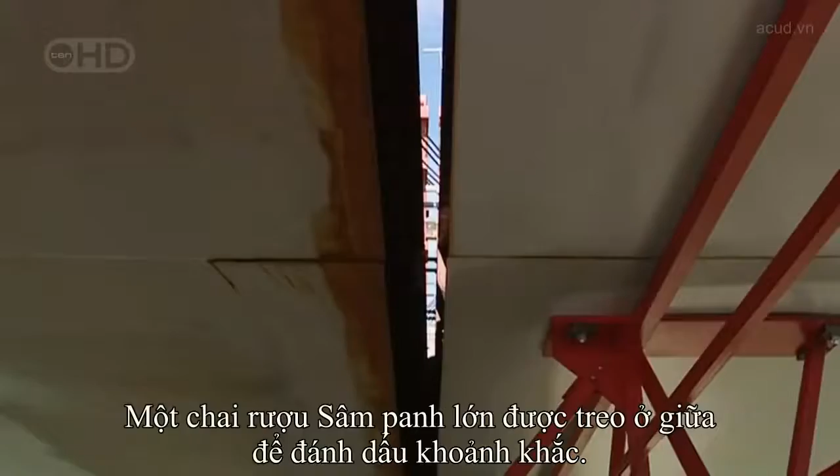The deck pushes forward. Now, with only centimeters separating the two sections, a magnum of champagne is hung between them to mark the moment.

At last, union. The two massive steel decks have traveled high over this valley, a total of 2.5 kilometers, and when they check, they're aligned to within 1 centimeter. That's accurate to within 99.9999%. All the measuring, all the calculations have paid off. They've nailed it.

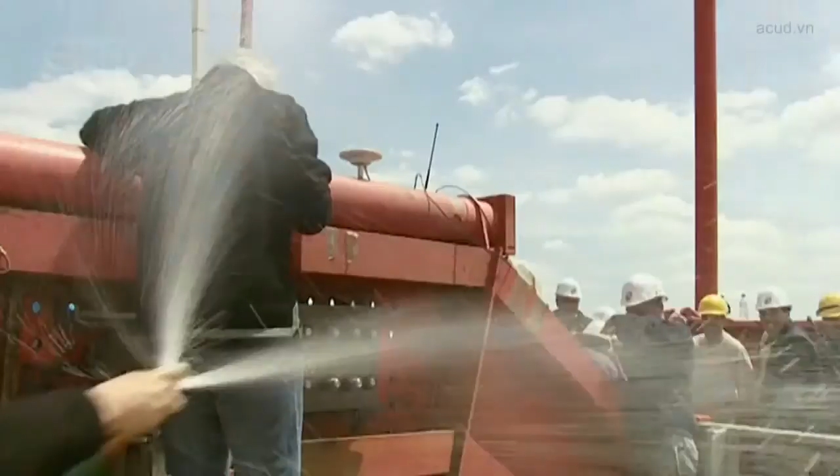The meeting of the decks was a special moment. News reports traveled round the world, and in Salzburg, Austria, they reached Felix Baumgartner, aka Felix the Fearless. Felix has made a career base jumping from some of the tallest structures on the planet, and within 24 hours, he'd driven to Millau and was calculating the logistics for the jump.

Factoring in his two main aims, to avoid arrest and death, Baumgartner waited for darkness before arriving on site. He found his way to the base of Pier 2, then climbed an access ladder the full 245 meters to the top. He entered the steel road deck and found a place to hide until daybreak.

He had to remain concealed until the sun was high enough for his cameramen to record his world record attempt. At 7 a.m. the following morning, Felix the Fearless emerged. He took a cool backward flip off the tallest bridge in the world and entered the record books.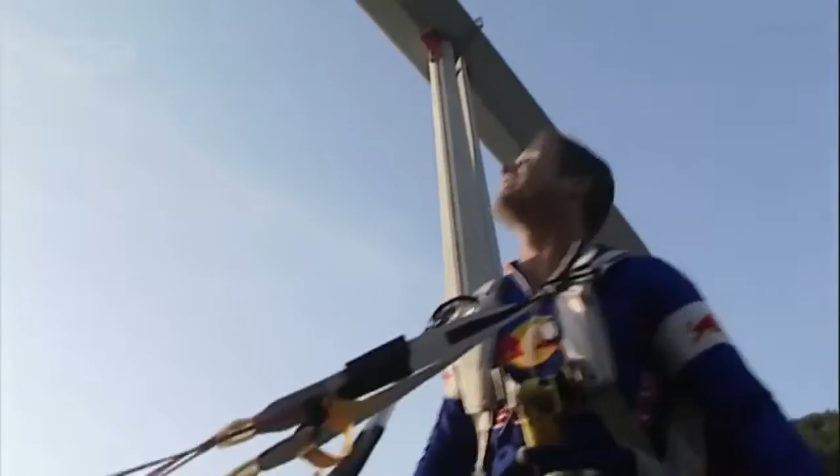The tallest bridge in the world, 250 meters. I did it. And having evaded death, he made sure he's not caught by the police.

The decks have been joined, and the team have reached the final phase of the project. But there was still a race to meet the schedule, and their problems weren't over yet. Everyone could see the dramatic undulations in the flexible steel deck. Even some hardened bridge builders wondered about its structural integrity.

It was a huge surprise for everyone. All the engineers said, we knew steel was flexible, but not that flexible.

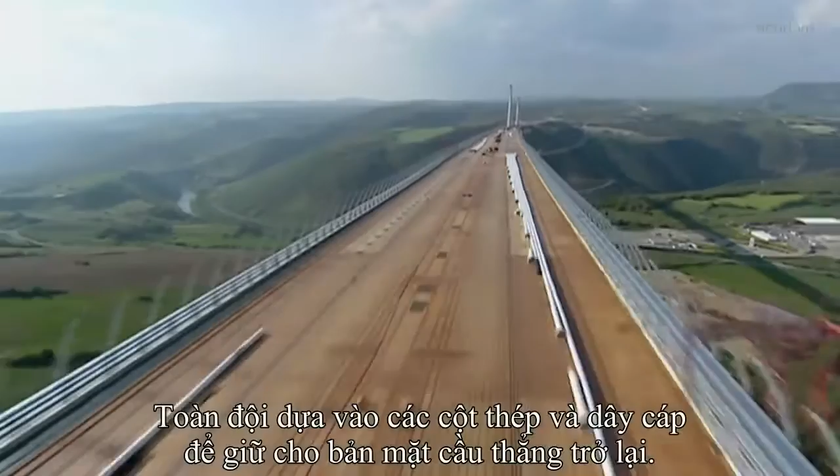The team were relying on the pylons and cables to pull the deck straight. Each massive pylon is 90 meters high and weighs 700 tons, the equivalent of 85 London buses. Placing them in position on the slender deck, high above the valley floor, would go beyond anything ever attempted. Once again, Marc Buonomo had a plan.

You know, the first people to make vertical pylons were the Egyptians. Buonomo adapted a technique used in ancient Egypt to erect obelisks in the sands.

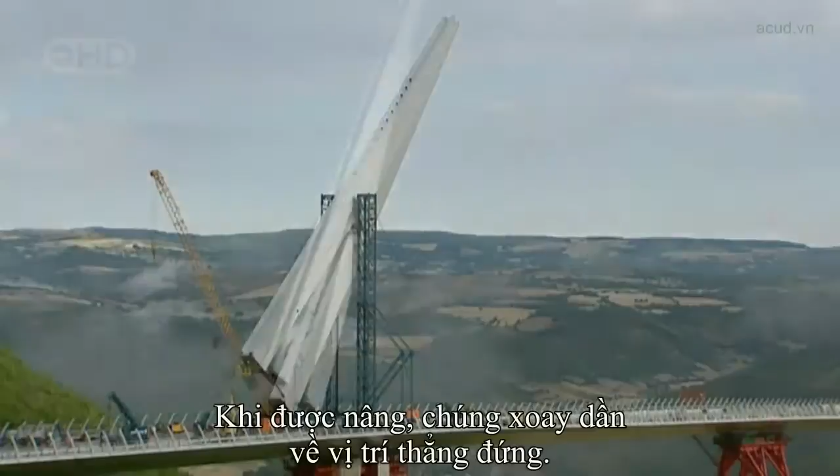On top of the road deck, the team put up two enormous steel towers, both of them secured by cables and equipped with a hydraulic system capable of raising 1,000 tons. The 700-ton pylon is then lifted by the hydraulics. As it rises, it pivots little by little until it's vertical. It's then lowered safely onto its anchorage point. Buonomo's 4,000-year-old technique worked to perfection.

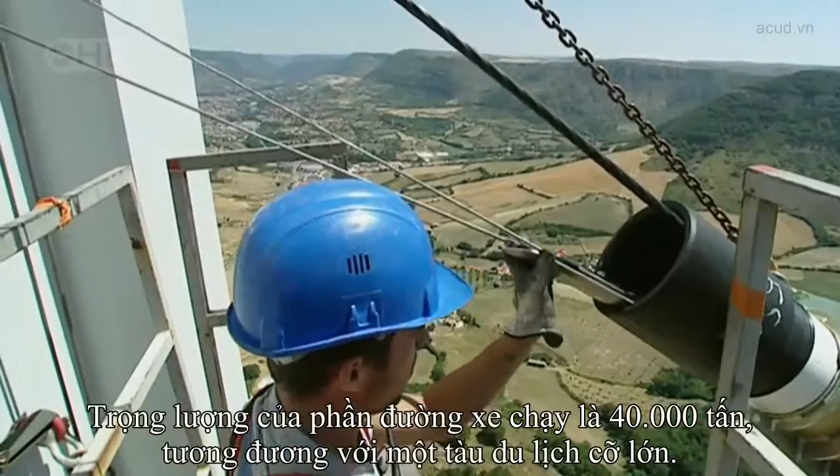With all 7 pylons in place, the team could attach the cable stays that would straighten the rippling deck and give it the strength to cope with full traffic loads, they hope. The weight of the roadway is now over 40,000 tons, the equivalent of a cruise ship, and the 154 cable stays should prevent it from sagging or collapsing.

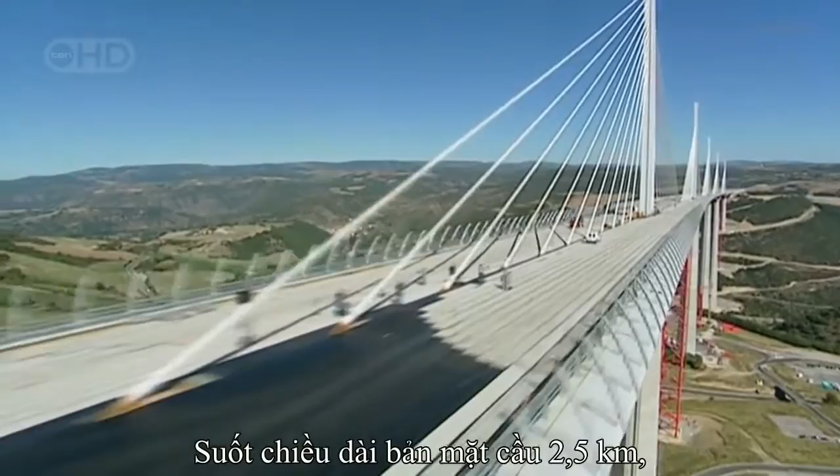The strongest stays are made up of 91 individual steel strands and have a breaking strength of 25,000 tons, strong enough to hold back 25 jumbo jets, all at full throttle. As the cable stays are tensioned, true to plan, the ripples in the road deck are pulled straight. Over the 2.5-kilometer deck, the ripples are now no larger than the size of a thumb.

They're finally on the home straight. The road surface goes on, adding a further 10,000 tons to the load. That's like driving 153 battle tanks onto the deck. But before it could open to the public, the team needed to know the bridge is safe. It would have to pass one crucial test.

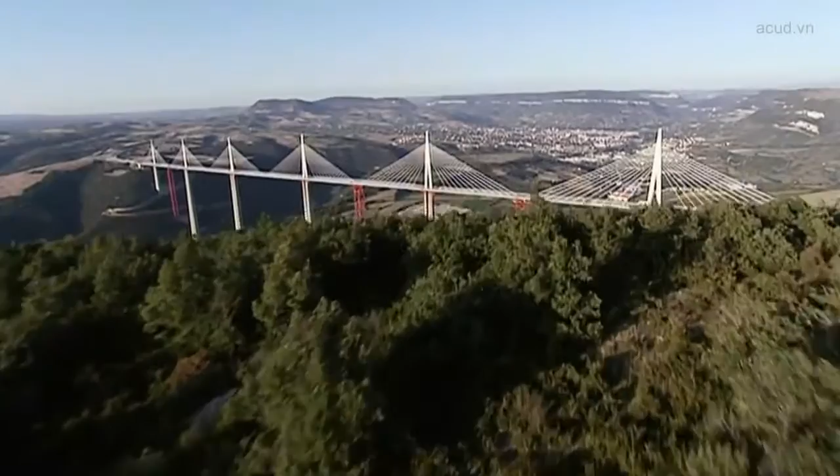After 3 years, the construction team building France's Millau Viaduct, the world's tallest bridge, are about to find out if they got their calculations right.

On a single-span cable-stay bridge like the Normandy Bridge, a large load on the main section is no problem because the cables are attached to solid ground and can't give. On the Millau Viaduct, with its 8 spans, the cables are attached to the deck of the adjacent sections. A load on one section will cause it to drop, pulling the stays down. As the pylons lean in, the matching stays are pulled upwards, lifting the neighboring decks and causing a dangerous rippling effect.

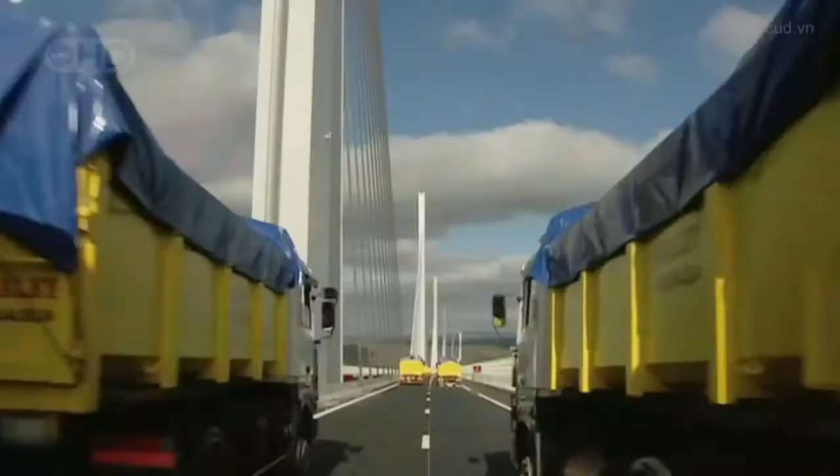It's right now the team put their bridge to the test. These 28 trucks have a combined weight of over 900 tons. They are now positioned in the critical point, mid-span. The engineers hold their breath. Measurements are taken. The span bends just 26 centimeters.

This is a triumph for the engineers. The bridge was designed to cope with more than double that.

4 weeks later, on December the 14th, 2004, President Jacques Chirac officially opened the Millau Bridge. A proud moment for the whole of France.

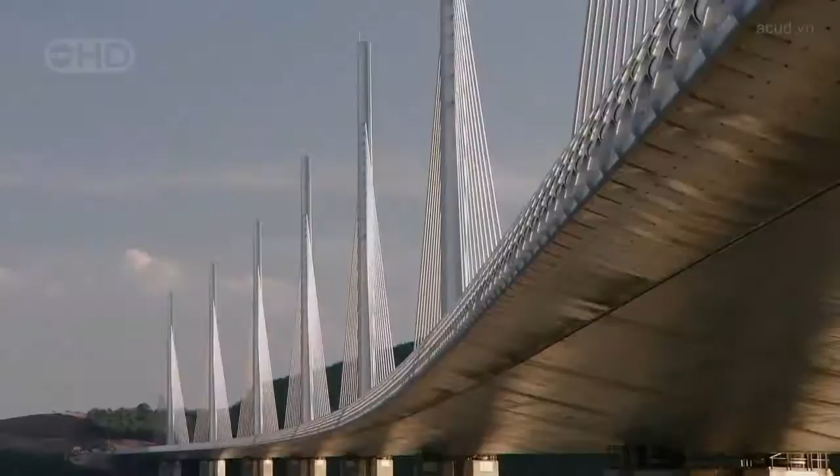Just over 3 years of construction have produced the tallest bridge in the world, designed to last at least 120 years. And against the odds, the project manager even brought the job in on time. But that's not what he's most proud about.

What I remember, because on construction sites there are often accidents, is that we had no serious accidents, nothing more than a minor injury.

As soon as it opened to the public, the bridge was an instant success. But the real test isn't till its first summer, when the French all take their annual vacation.

No one ever expected anything like this. Numbers peaked at more than 50,000 vehicles a day. At over $7 per car, that's great news for the construction company, who are clawing back their $478 million investment in the project.

This was an epic bridge to build, but it's just as epic to maintain. Thierry and Frank are assigned to P2, the world's tallest bridge pier.

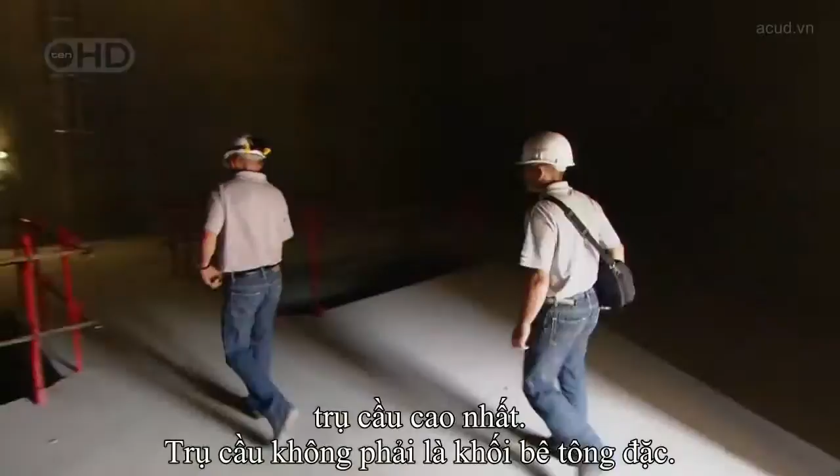This structure is no solid concrete block. It's a series of vast hollow spaces. Their job today is to test the communication system and electric circuits on each of the 7 structural floors.

This involves a 343-meter climb, going hand over hand up a ladder for the rest of the day.

By dusk, when Thierry finally reaches the summit of the pylon, he may be exhausted, but there is a payoff. You get a fantastic view from here, a 360-degree panorama.

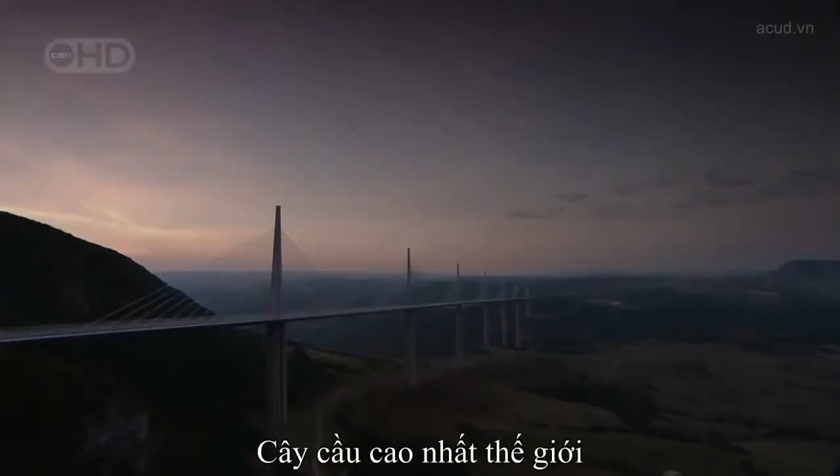The tallest bridge in the world has become an icon. But this is creating problems no one had ever imagined. Locals have been taking over the bridge as a platform to get media attention for their causes. This crowd was hoping that driving sheep over this freeway in the sky would help them get more farming subsidies.

Jose's job is to prevent this kind of incident from creating a danger, and on this bridge, the incidents keep on happening. An alarm triggered by a motion detection system means there's a stopped vehicle on the bridge. Immediately, Jose dispatches a colleague to deal with the situation.

The last thing anyone wants is a multi-car pile-up on a 2.5-kilometer bridge, quarter of a kilometer in the sky. Jose zooms in his camera to reveal the man has left his car and is sitting dangerously on the crash barrier. The driver's probably only broken down, but already one man who stopped climbed over the wind barrier and jumped to his death.

Bruno intervenes. Thankfully, it's no more than an irresponsible photographer who's sent on his way.

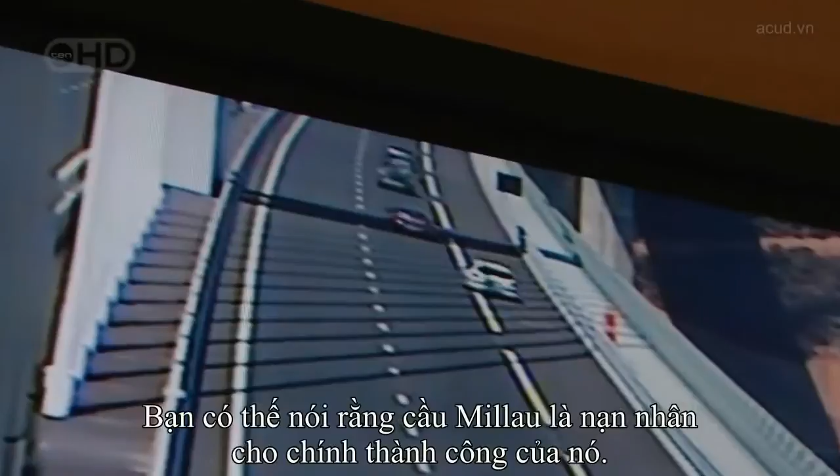You could say the Millau Bridge is a victim of its own success. It's definitely become a major tourist destination. 700,000 visitors in the first 9 months.

Fortunately, most of them wait till they're off the bridge to take their photos.

It's magnificent. I came 600 kilometers today to see the Millau Viaduct. There's only one thing to say. It's extraordinary. They're drawn because it's a world-beating structure, but also because it's incredibly beautiful, delicate and minimal.

Not what you'd expect from a structure that's nearly a third taller than any other bridge on the planet.

Architect Lord Norman Foster's achieved his aim to give the driver the sensation of soaring. As you leave these plateaus, you do fly. You fly across this bridge. Literally, you are above the clouds.

And the result certainly pleases the man who dreamt it all up. To see erected this bridge, which I imagined 15 years ago, it's something magic.

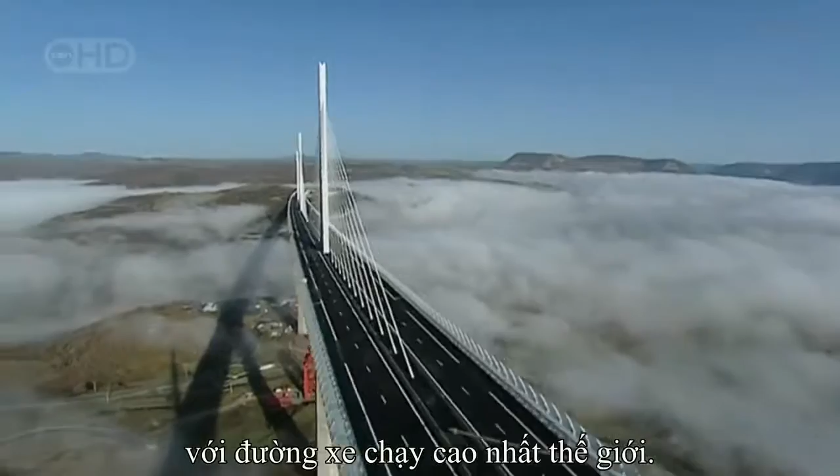This is the longest pure cable stay bridge in the world, the tallest roadway in the world, and of course, at 343 meters, it is the tallest bridge ever constructed.